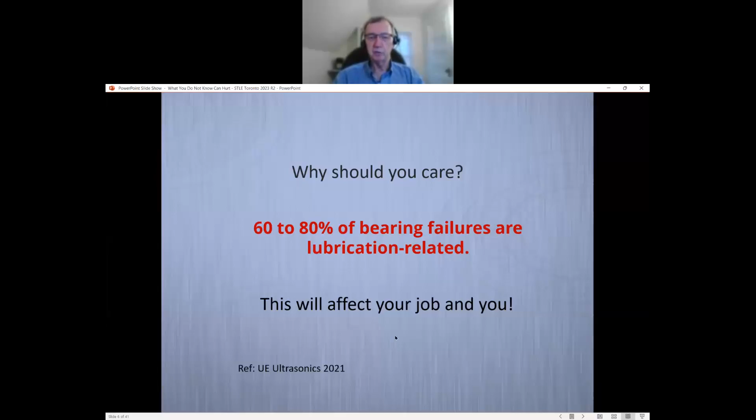What else are we doing? Motor failures - the main problem with motors isn't necessarily electrical. 50 to 65% of all motor failures were because of bearings, and poor lubrication practices account for most of these bearing troubles. In an EPRI study, they found more bearings were failing from over-lubrication than under-lubrication. When you first grease a bearing, the temperature will go up, and sometimes operators say, 'stop lubricating, it's getting too hot' - but no, it should go up and then come down. If you over-lubricate it, or if there's no place for the grease to go, the temperature won't come down, and it will churn the grease, leading to grease failure and bearing failure. This requires proper maintenance procedures, but also planning and use of the correct lubricant to increase productivity by reducing bearing troubles and motor failures.

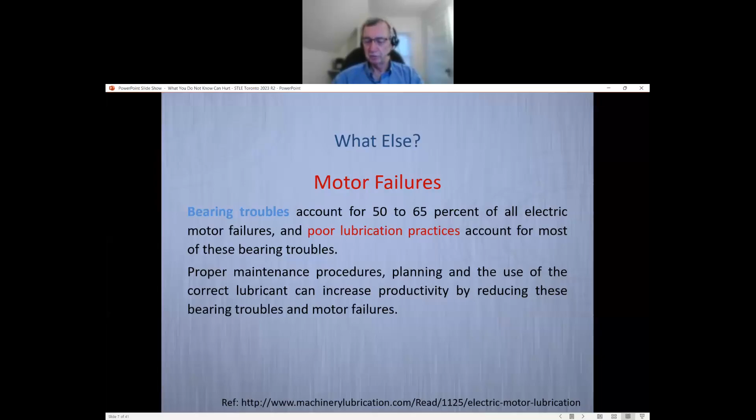About 80% of bearings are grease lubricated, but almost no plants monitor or test their greases. There are simple devices out there called grease thieves and things like that - you can test the grease to see how it's doing. In some cases, even on nuclear plants for motor-operated valves, they just have little plastic bags full of different greases of different consistencies, and use tactile and color testing to determine whether the grease needs changing. So there are a number of very simple things that can be done, but something should be done.

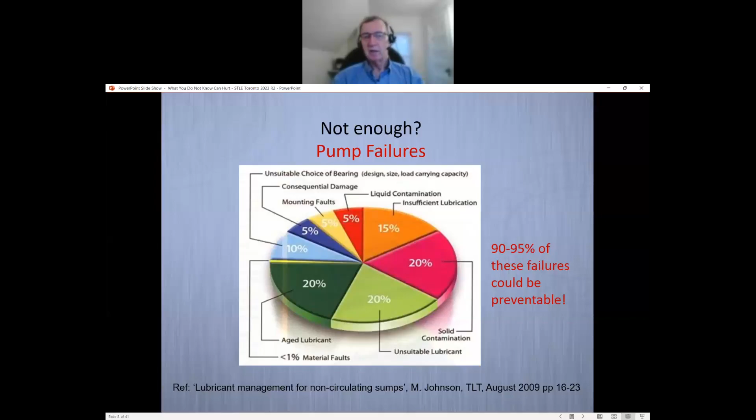How are we doing on rolling element bearing failures, as opposed to just bearings in general? This is one of the biggest things that is most concerning to me as a professional engineer. Only 3% of bearings reach their design life, failing by subsurface initiated fatigue. That's unfortunate. So when somebody says, oh, we have an L10 life of 60,000 hours, they don't get there because they're murdered earlier for a number of reasons.

In this example, SKF said 50% of failures were because of abrasive wear, that's just bad seals, or it could also be contaminated lubricant. They found 30% failed from marginal lubrication, that would typically be under lubrication, and 17% from other causes. So there are things that can be done.

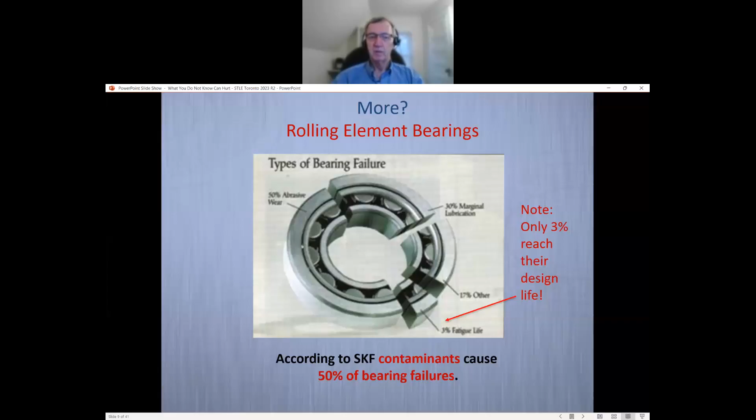Do we design correctly? Bearing fatigue lives, this is something certainly all engineers get when they go through. Hopefully they're using the adjusted rating life now, that ISO factor, the life adjustment factor based on the new life theory. They have to take that into account, and I'll show it in a second.

But the things that affect the bearing life, this is the L you see on the side there, for millions of revolutions. Normally it's L10. L10 means 10% of the bearings will fail within that period of time. If you want a higher life, you have to go to like an L5 or L1.

Unfortunately, that usually means you have to increase the size of the bearing. That might force you from grease lubricated to oil lubricated. You might have to put in cooling, things like that. So you're much better off trying to allow the bearing to get to its design life by improved tribological practices.

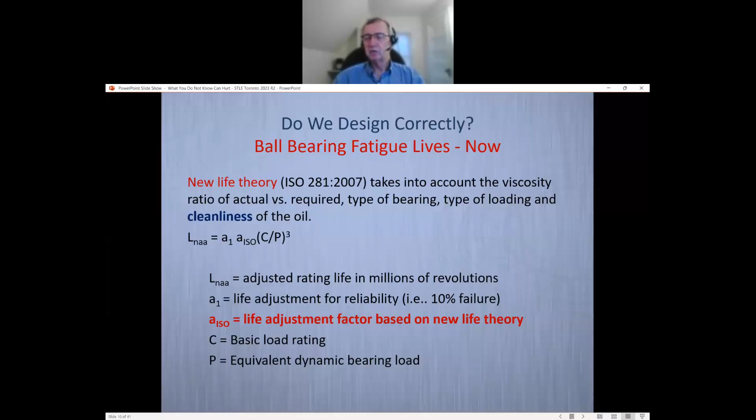What are some of these? First off, the ISO factor takes into account degree of contaminants by a factor EC, and using the lubricant as supplied based on a typical contamination code, it can reduce the life by 50%. Especially for rolling element bearings, when the oil film is just microns thick, you have to use the proper and clean lubricant. Are we getting better?

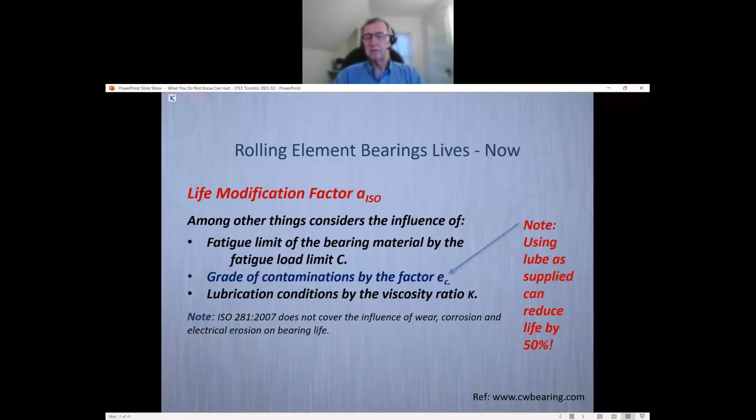This was from a presentation given in the Hamilton section by SKF. Again, they found that the bearing failures in this case were poor fitting, that's from installation, we'll talk about that briefly later. Poor lubrication at 36%, 14% by contamination, and fatigue 34%. Fatigue in this case can be both subsurface fatigue and surface initiated fatigue.

Surface initiated fatigue is the pits and spalls and things you get sometimes from installation, from false Brinelling, or it can also be from contaminants in your lubricant. So we're still not doing particularly well.

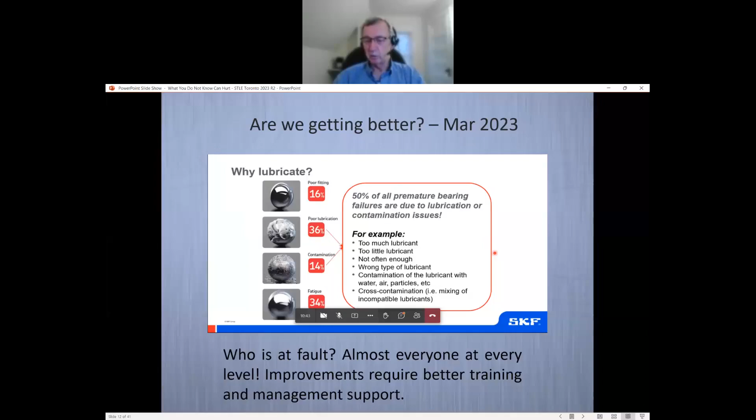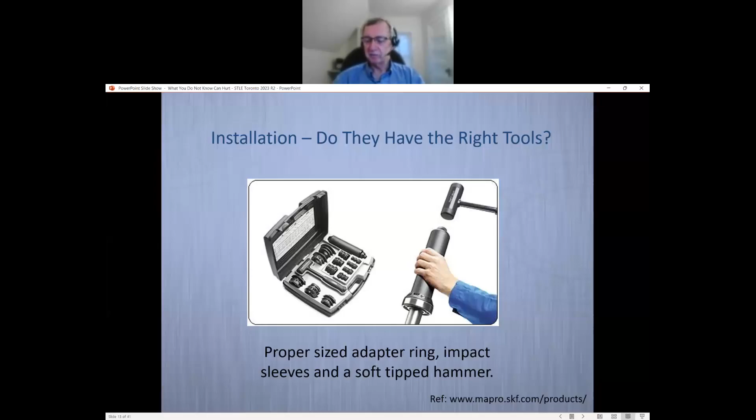And this is one reason why. When you're installing the bearing, especially when there's a force fit on the outer housing, and usually a sliding fit, you don't want to put the force on the inner ring through the rolling element to the outer ring, because that causes Brinelling, which is an indentation, which would then lead to failure. Again, very, very simple, but people have to be trained how to do it properly.

This is a calculation you can go through, and in this case, it showed you needed 33 grams of grease, which is 1.2 ounces, with this typical grease gun that can put out 10,000 psi, and that's correct, 10,000 psi for the typical grease gun. Some are even higher, and that's why the grease has to have someplace to go, because you can damage seals, and shields or seals on the bearings as well.

That can take 43 strokes. One plant I knew was having difficulty with their greasing, so they said, well, each bearing's only going to get 3 shots of grease. That's absolutely no good at all. You have to know how much to put in. The difficulty is you don't know what's been done in the past when you walk up to a piece of equipment, whether or not it was done properly.

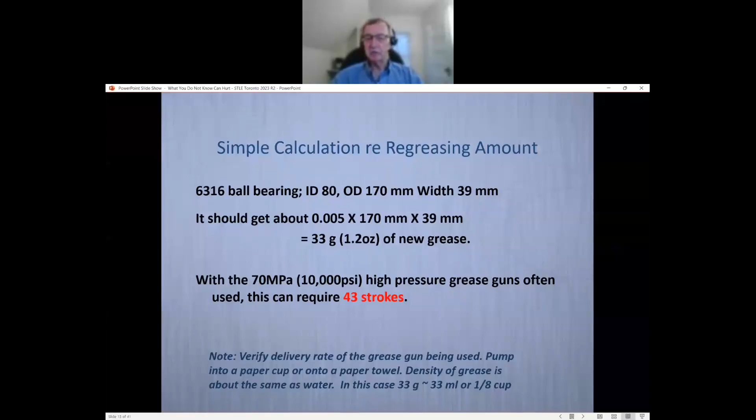And how does the person know to put in that many shots of grease? Look at the grease gun? No. Most grease guns, it doesn't tell you how much they deliver. The information is on the package, which is not kept with the grease gun.

This particular grease gun is also a dual type, but it has dual delivery to further complicate it. It outputs 5.2 ounces with 100 strokes. So again, people have to know how much grease to put in. You can't just pump it till you get resistance - remember, that was 10,000 PSI. So you don't want to do it that way.

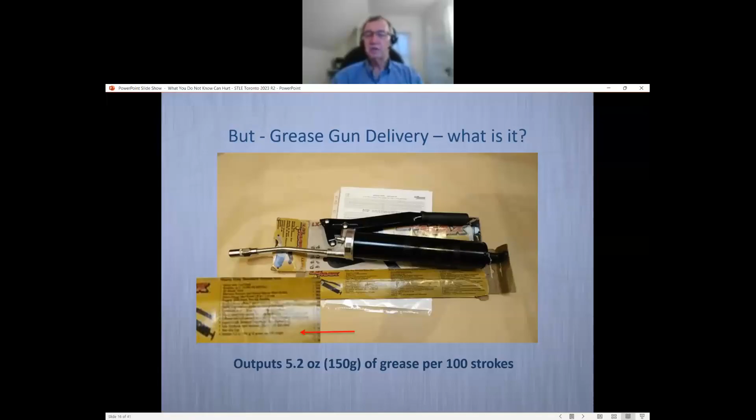What do you do? Fortunately, there are a number of devices out there now, especially using ultrasonics. There are a number of things that can be done that know how to do it properly. You don't give greasing to somebody who has deficiencies or impairments or is unable to do some other job. You want to give it to somebody who's been trained to do it properly, and you've given them the right equipment so they know how much grease to put in.

Now, just a little bit on particle counts - I'll go through this briefly. It's a little complicated, but it actually counts the particles at 4, 6, and 14 microns. It used to be 5 and 15 microns, but then they found the AC fine test dust wasn't the size they thought it was, so they came up with these codes to try to keep the same numbers. Basically you look through this: say you end up with 1,000 particles of the 4 micron size, that falls between these two numbers, so that code would be a 17. So a 17, 15, 12 means that for the 4 micron size, there's somewhere between 640 and 1,300 particles.

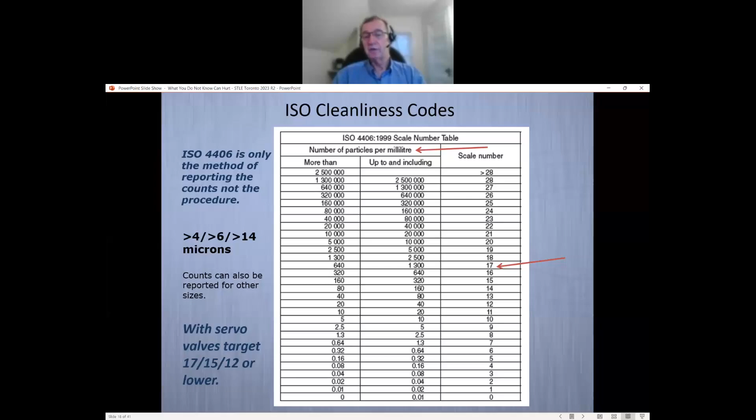Well, why is that important? This was some work done by Noria and Dr. Fitch at Oklahoma State University in the US. It shows that if you start with, on the left there, a 22, 20, 17, and you improve it to a 15, 13 for a gearbox, you can actually improve the life of the gearbox by 3 times just by using a little bit cleaner oil. You can go through all sorts of other categories as well, whether it's servo valves or things like that with hydraulics, 17, 15, 12. You can see how much you improve the life. This has huge cost implications and savings.

So you have to spend a little bit of money to get some of the proper filtration equipment and maybe some of the proper handling equipment. But more and more companies are understanding the importance of having clean lubricant and keeping it clean.

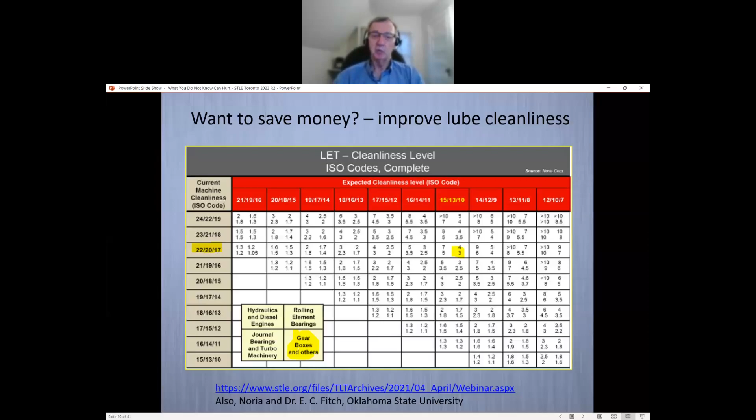Most oils do not wear out - they get contaminated. There are some differences with motor oils and certain additives, but usually the issue is contamination, and you want to prevent that. In hydraulic systems, for example, more than 3/4 of all the problems can be traced back to contaminated oil. That's something you can see especially on hydraulic equipment working in dusty, dirty environments. If their rod seals aren't working properly, things like that, contamination gets into the oil. So you have to stop it getting in, and when it gets in, you have to try to get it out. But generally, it's a good idea to try to stop it getting in the first place.

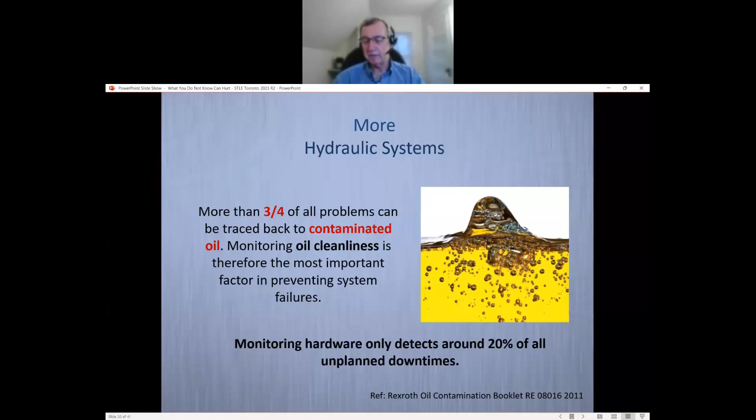The interesting thing is that monitoring hardware, for example temperature and vibration, doesn't necessarily help you with contamination until it's too late. If you get a spall on a bearing, it has to get big enough before vibration or other types of methods can pick it up. So you're better off keeping it clean and testing your lubricants.

What can we do for better seals? Lip type seals have a limited life. O-rings are not good as dynamic seals at all - they're good as static seals. But even lip seals, their life might only be 8,000 hours. For an automotive bearing, that's okay, that's a long time. But for something running 24/7, that's not good enough.

It's also much better off having a non-contact type seal. In this case, one part rotates with the shaft, the other part is stationary, and it keeps the lubricant in and just keeps the dirt out. Plus, because it's non-contact, it doesn't generate heat. A lip seal will generate heat just because there is friction.

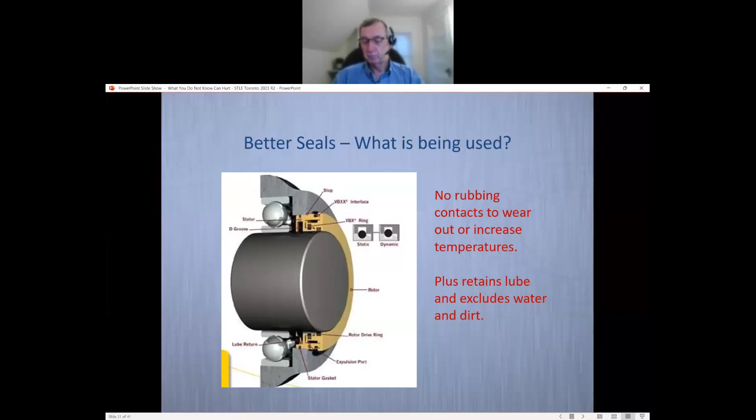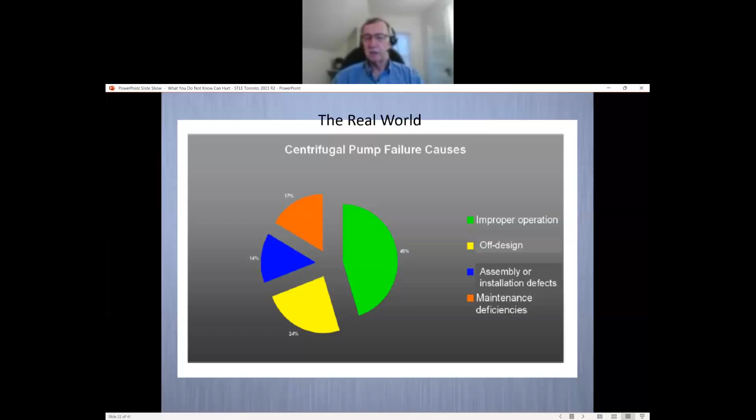This is what that plant did that had those failures—they reduced their failures considerably just with a little training and awareness. They didn't spend anything on more equipment. So again, huge benefits just from improved awareness.

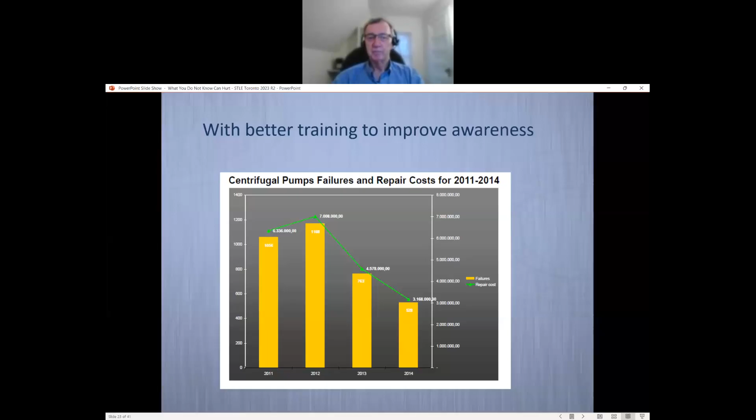How hard is it to do it right? Well, if you want to prevent grease contamination, one thing is color-coded caps, and people have done this. You can get grease guns now with a clear case so you can see what the grease is, or some people paint them or put codes on so they know what they are. You can also have grease caps.

You should have these grease caps anyway, because one of the worst things when you go into a plant is if the grease nipples are all nice and clean—that's bad, because dirt sits around the ball inside the fitting. So leave a blob of grease on it so people can see the color, or use a color-coded grease cap. You can also have little pressure relief devices that relieve pressure if it gets too high. The other option is screwing the zerk fitting out so the grease has somewhere to go. It depends on your situation as to what you can do.

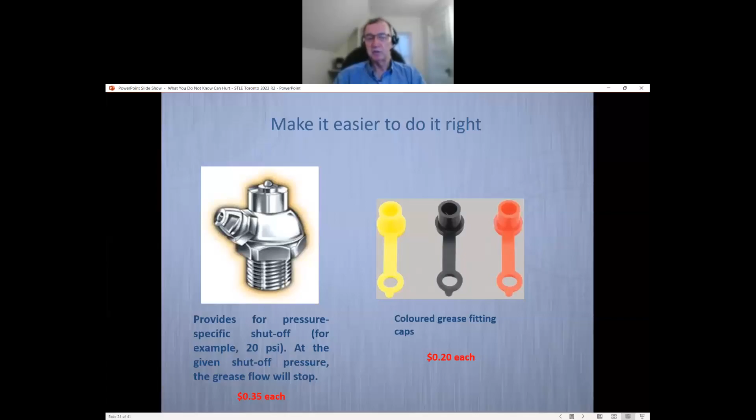So what are some of the things that can be done? This actually goes back quite a while—it's based on an International Atomic Energy Agency document on information strategies and tools for condition-based maintenance at nuclear power stations. They talked about the importance of training, skill standards, and certification. This is very, very important.

There are a number of places offering training now for lubricators. STLE has the CLS and also analysis courses and different types of certification courses. But for people in the plant, there are probably the ICML ones that are very good as well, to give people a bit of understanding about what you can mix with different greases and what can be done. But it is important to have training.

You should have in your company at least one subject matter expert—we call them SMEs—and hopefully some supporting training for your fitters. Unfortunately, at some stations I know about, once they hire a fitter, they never give them any training for the rest of their career. That's totally backwards, because technologies have changed. A lot of things have changed.

For example, just look at your car—how often do you change spark plugs these days? You almost don't; they last the life of the vehicle rather than having to be replaced every year. You can get the same improvements in some of your plants and equipment by using newer technology, without spending a lot of money.

The other thing that's big these days—and Canada seems to be a bit behind on again—is getting registered to ISO 55000 on asset management. I'm not going to go through these, but there is a reference, so I suggest you look it up, and hopefully your company is trying to implement that. That's something you can look at later.

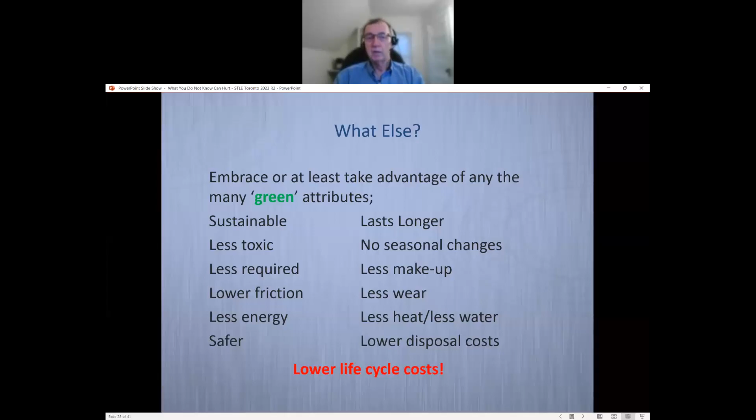Just an example of why it lasts longer. I sometimes found that people said, 'Oh, well, if the oil is dirty, we'll just change it.' It's amazing how much it really costs to change oil when you take into account all the things. If you want to, you can go to some of the references to find all the details. But in that case, I went through it for a nuclear plant, going through all the things it took to get the lubricant.

If you're adding a liter of oil, it doesn't just magically appear. Somebody's got to go get it. It's got to be stored. It's got to be stocked. It's got to be purchased. It's got to be checked. It's got to be tested. When you drain it, it's got to be tested, certainly for chlorine to make sure it's not PCBs. It goes off for waste disposal. There's all sorts of costs.

In this thing, the cost came to 40 times the cost of the new oil. So if you can get something that lasts longer, takes less changing, there's obviously huge benefits. In this case, on the one product that was mentioned earlier that I helped develop for motor operated valves, by not having to pull out a motor operated valve inside containment, things like that, was saving them over $7,000 a year. So just by having a grease that was able to last 5 times longer, they saved tens of thousands of dollars. And the new grease, a standard grease for example might cost $5. A really good grease might be $10. So it's twice the price, but it saves tens of thousands of dollars. So engineers and people have to get used to looking at cost justification.

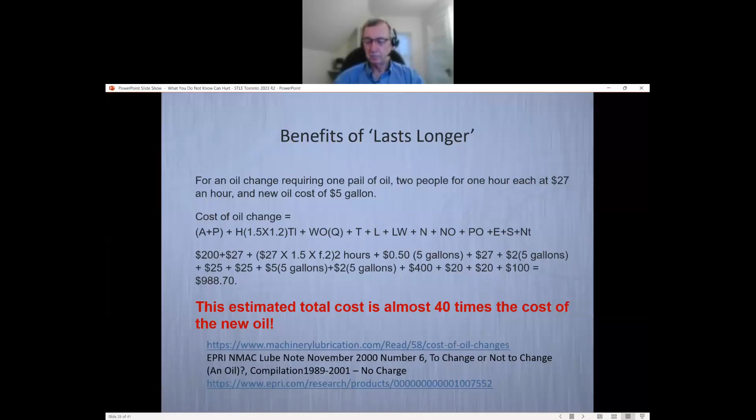Now, just a little bit briefly on viscosity, we're seeing a lot more of it these days, especially now with zero W16 oils, and they might even keep going down. The focus is on energy conservation, because there's less losses, churning, friction, and wear losses with the lower viscosity oils. They still work just as well, providing the engine is designed for that. But again, most engine wear occurs on startup, not during normal running operation. So if you can reduce the startup losses and reduce the startup wear, you're getting much, much longer engine lives. And even with these 0W16, 0W30, even 5W30 oils, engines are still lasting hundreds of thousands of kilometers if they do the proper oil changes.

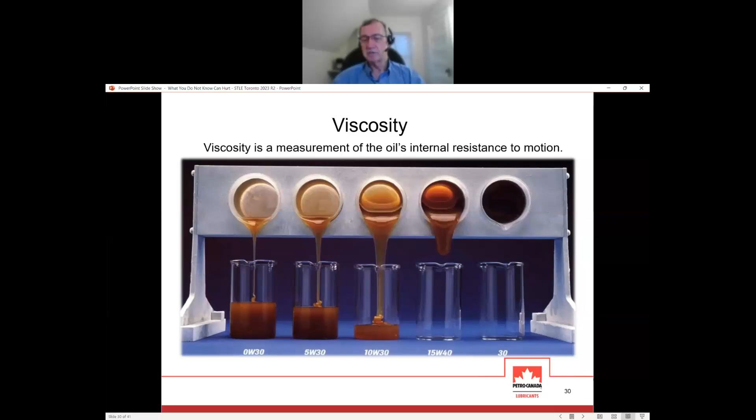So what does this mean? This is an example not just for engine oils, but also for hydraulics and other outdoor equipment. If you have a higher viscosity index, it's better at low temperature, and it can also be thicker at high temperature. So there can be huge disadvantages with an oil with a poor viscosity index that can get into problems both when it's too cold and when it's too hot as well. Often there are huge benefits to using the right oil in these cases.

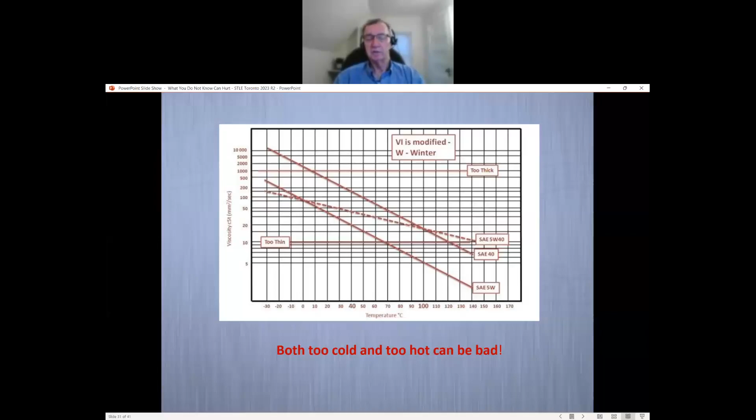I often find a lot of cases where people or plants were pushing, 'Oh, we have to reduce the number of lubricants we use.' Yeah, no, that's great. But what does it cost to stock one lubricant?

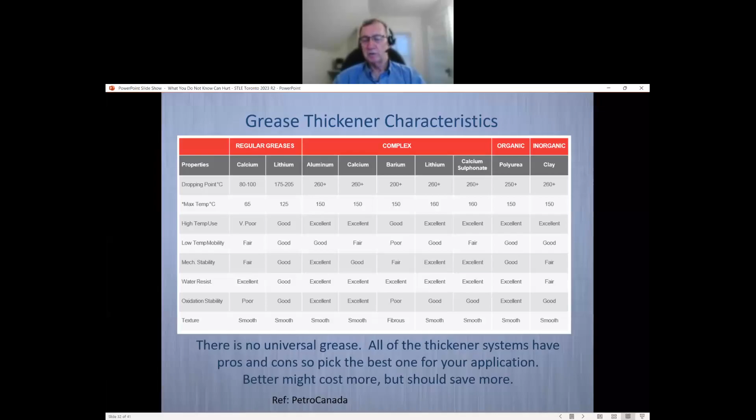I'll give some examples later. We found where specialized greases, for example, save tens of thousands of dollars because they were needed. There's no such thing as a universal grease - they have pros and cons. So you have to look at the particular application, what's needed, and whether you can get other benefits, and what it actually costs to stock one extra grease. I could never get that information from some companies I talked to. They said, oh, we have to reduce down to just 2 greases for the whole plant. I said, well, what's it cost to have 3? Well, I don't know. There has to be rationale.

Let's start at home. This is something I just dug up with these new SN oils. They're generally required for turbocharged engines, protection against low speed pre-ignition, LSPI. So certainly if you have them, you want to use the SN plus oil. The other thing is there's also energy conserving oils out there that you can buy to improve fuel economy. They say they can save 1.5% or greater over the standard reference oil. So even if you're just buying oil for your car or equipment, if they have an energy conserving option, use it.

There's also, for engines with a lot of miles on them, high mileage oils that have a little bit of ester in them for seal swell. You don't want to use it on a new engine, but the benefit is it reduces leakage, reduces oil loss, reduces contamination, and reduces oil makeup. Again, huge savings just by using the right product.

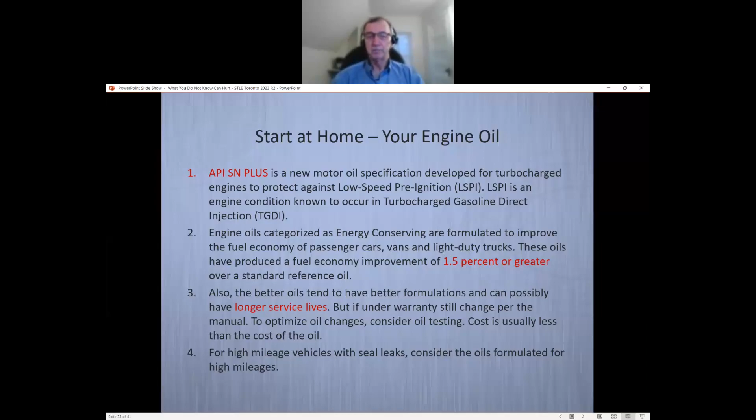The problem is that when the shaft is rotating, centrifugal forces cause the oil to separate from the soap. The soap would migrate to the outside, and in most cases the soap has no lubricating capabilities, so the gear teeth would fail. But by spending a little bit more for the grease, they could save hundreds of thousands of dollars on not having to change out the coupling. Because the coupling is not easy - you have to pull it off the shaft, often by heating it up or using hydraulic mounting. There's damage either way when it's replaced, but there's also the downtime. So again, just using the right lubricant when it's needed can save a lot of money, and it's easy.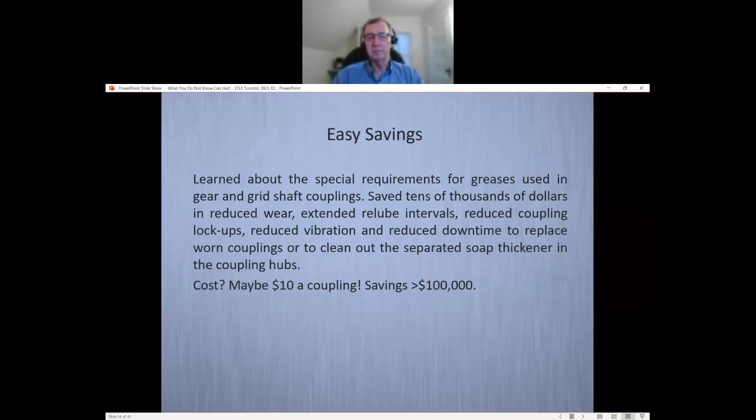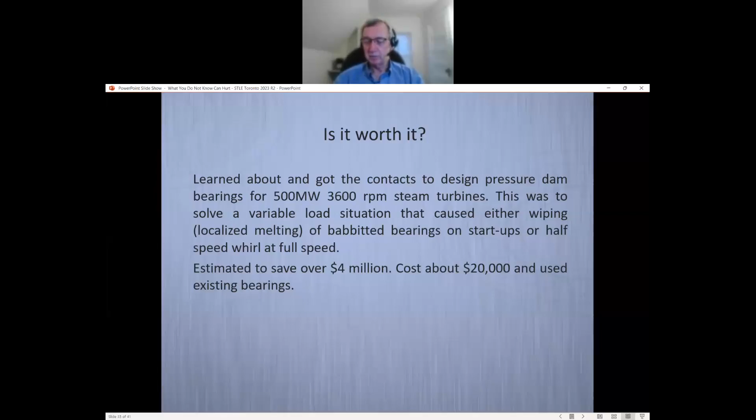Is it worth it? This was an example of a problem with some steam turbines having vibration problems at high speed because they're lightly loaded. Steam turbine bearings are generally over-designed to allow for loss of bearing type situations. But if they jack them up with preload to stop the whirl at high speed, they'd get wipes at low speed. In this case, it was about using a pressure dam type bearing where they could just modify the top half of the existing bearings, and that solved their problem with the half speed whirl. It only cost about $20,000 a bearing, and was estimated to save over $4 million. Again, easy if you know about it. How do you know about it? Go to meetings.

Is it worth it? This was an example of the advantage of just slightly changing a steam turbine oil. Most are now group 2 and group 3, but back then there were a lot of group 1s. The problem was that people are aware of the pour point of oils, but not necessarily the cloud point - when the wax crystals first start to come out. In this case, because the oil cooler was mounted on the outside wall, in winter wind would chill the oil inside the cooler, so wax would start to come out. When the pumps would start up, it would push that wax to the filters, causing too high a pressure drop and causing a trip. That wasn't good because a lot of these were emergency power generators and standby power generators - if you have one failure, you then need so many successive failures. But just by switching to a steam turbine oil that was severely hydrotreated solved the problem.

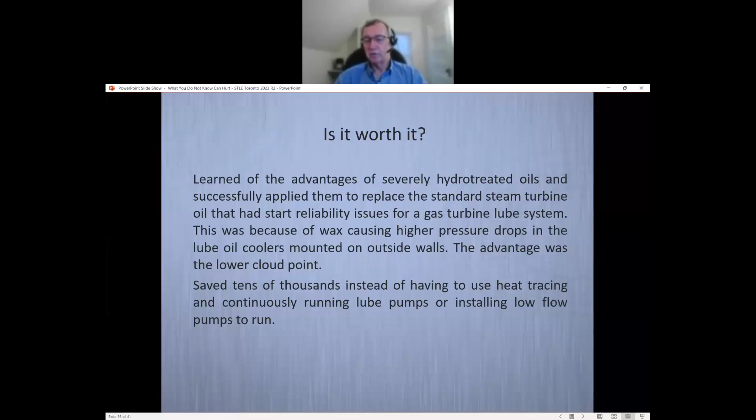What else can be done? This was an example of using a polyalpha olefin in a coal pulverizer gearbox. The payback period, just from energy savings, using the same viscosity without even dropping it, was only 122 days. Huge savings. Unfortunately, it wasn't done because the maintenance department paid for the oil, but operations got the benefit.

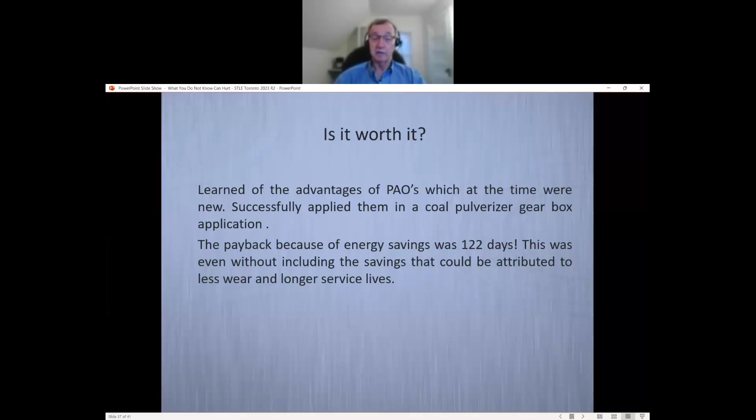That's not uncommon. As for improvement, who's going to pay for it? That's one of the systemic roadblocks in a lot of cases to tribological innovation. But it's not too late. What can we do?

Certainly, from my point of view, engineers have to be taught a lot more, and MBAs as well, about return on investment and life cycle costing. Also, root cause analysis should be part of design courses. When you're learning about pumps and hydrodynamics, learn about pump failure analysis, bearing failure analysis, seal analysis, and how to do it.

We also have to get MBAs, and management needs to be more aware of the benefits of life cycle costing with respect to asset management and tribological savings, especially at plants.

We were talking about some of these things. Why is Canada behind others? I don't know why supervisors don't necessarily ask their employees, well, what can we do to do our job better? And you can go the other way too, encouraging employees to make suggestions to improve things.

In a lot of cases, asset management and ISO 55000 can be the key to start doing things better and to get companies moving. I think the federal government could help there too by making sure their suppliers are registered to ISO 55000. Everybody's big on quality assurance, but why aren't they working on asset management?

So the last point there is continuing education. Especially for engineers, what you learn at school is in a lot of cases only enough to be dangerous. You have to learn how to apply that knowledge properly and to prevent failures, and that often happens after graduation.

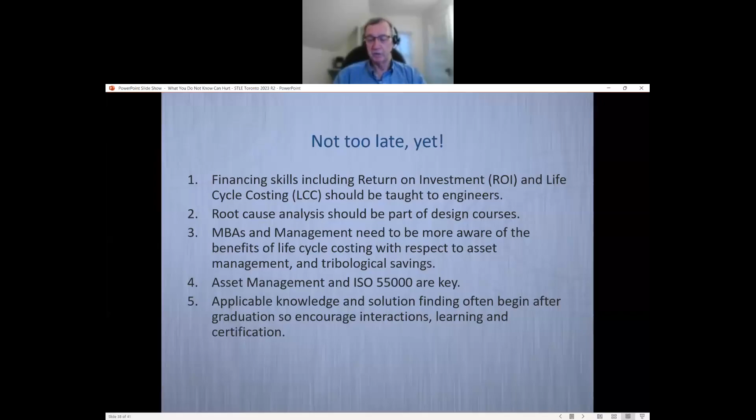And that was certainly true in my case as well, where I picked up a lot of that information from training courses and other seminars that I went to. I had supportive management to get involved in those things. Again, management is key. So, in summary: most bearings do not reach their design life.

The leading cause of hydraulic system failure is contamination. The leading cause of electric motor failures is the bearings. In my opinion, many failures can be easily prevented, and it can be easy to do better if you know—for example, just changing to a slightly different lubricant product. But unfortunately, the work environment must be conducive to change and receptive to life cycle costing savings.

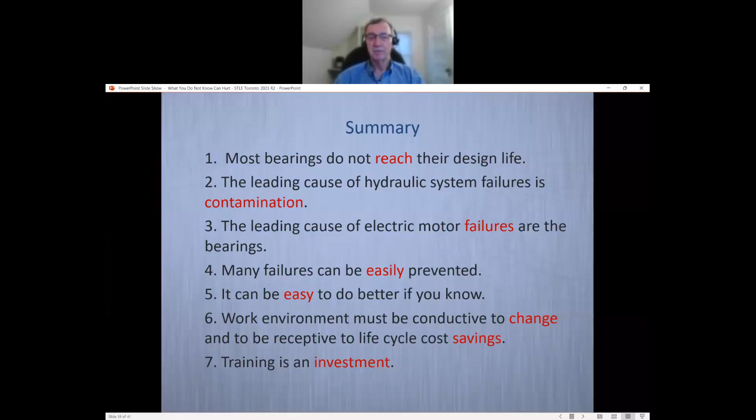Training is an investment in your employees and in your plant, so this needs to change. That's another quote that I got just recently. This refers to banks, but I think it applies to a lot of companies.

Buffett said that more banks will fail over time because managers continue to do dumb things at times to boost short-term profits, and I see that as well. They're trying to reduce costs on things, and sometimes it's just arbitrary—well, we're going to reduce costs by 10% without thinking about the long-term consequences.

So that's it. Hopefully you've enjoyed that, and now there's time for some questions.